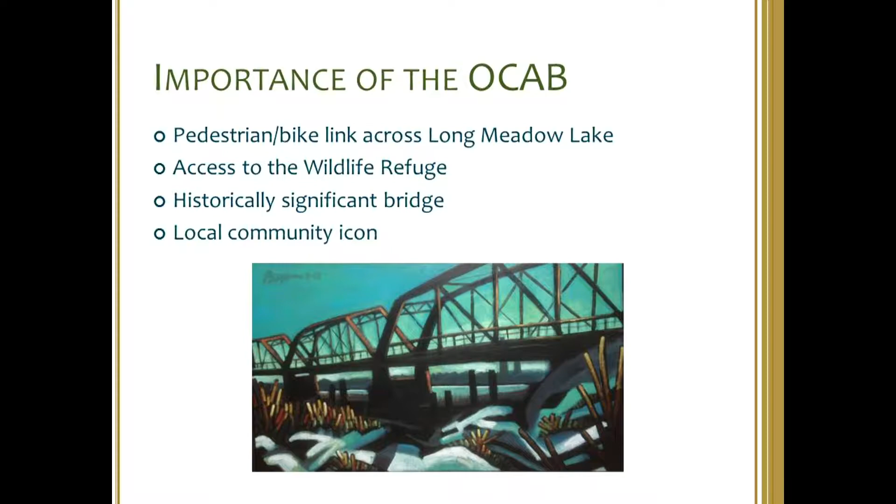Really, this is an important facility in the community. First off, it has been and will be, when it's finished, an important pedestrian crossing of the river valley and of Long Meadow Lake. It provides good access into the Wildlife Refuge that surrounds it. And it is part of the National Register of Historic Places, so it has a significant historic portion to it. And as evidenced by the painting on the bottom, this is a subject of many, many pictures and paintings, and is really a local icon.

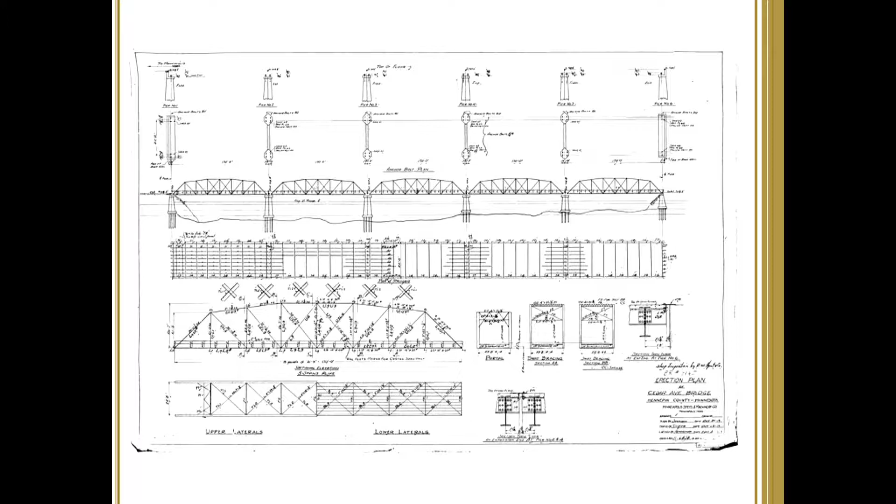This is a picture from the original plan for the bridge, and it's technically called a 5-span camelback through truss bridge. It was built originally in 1920 by Hennepin County and became part of the highway system. It was actually abandoned when the new bridge was constructed in 1979 and turned over to the city for ownership. The city closed it to traffic because of the structural condition in 1993, and then to all traffic, including pedestrians and bicyclists, in 2002.

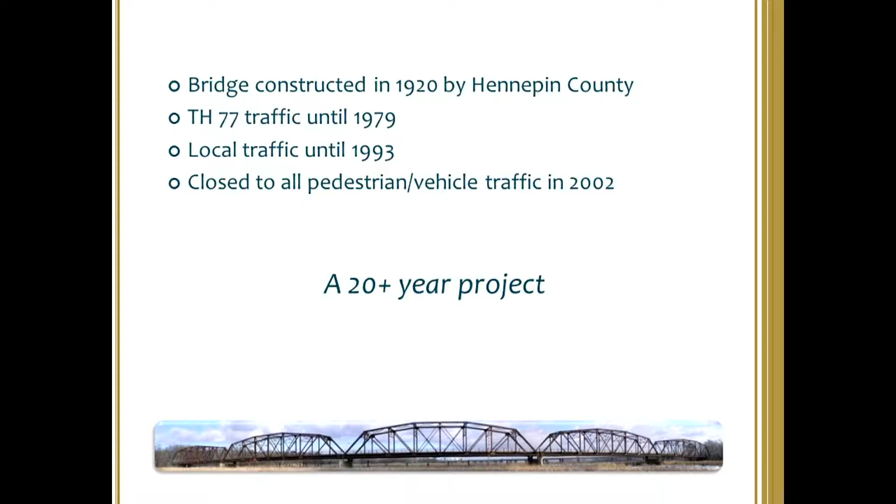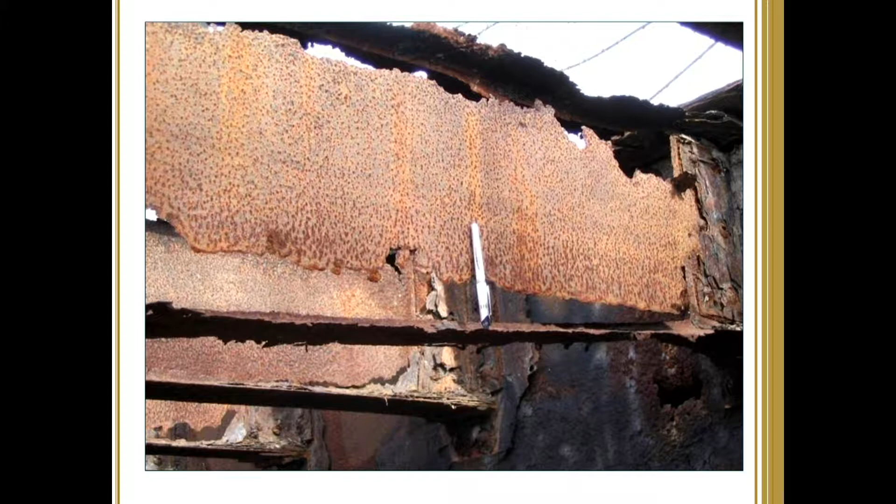And I'll show some pictures of its condition that will show why that was closed. So since its closure, we've been working on trying to figure out a new solution for this. So this has been a long project coming. And really the reason that we're looking at it is it's in pretty darn bad shape currently. These are some pictures of the understructure steel, and you can see it's very much corroded. In many parts, you could actually put your hand through the old steel structure. And again, a number of pictures of the poor condition.

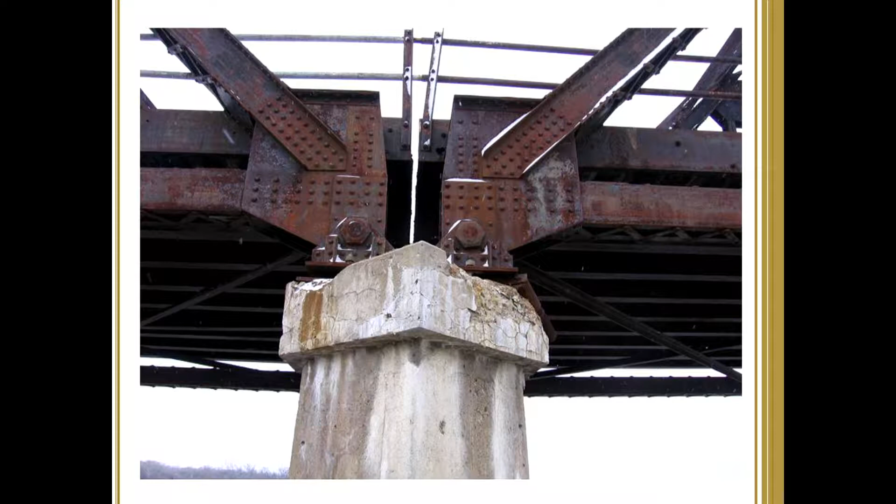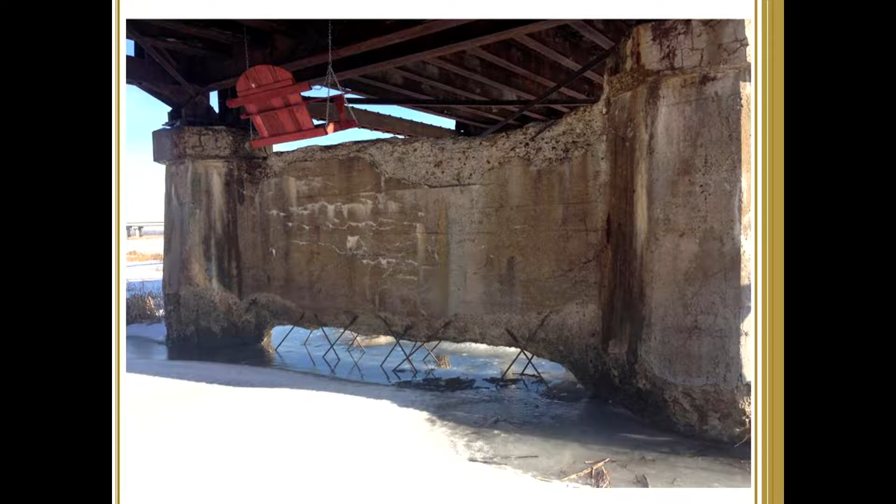Another significant problem is that the points where the spans bear on the piers, we call them the bearing points, are all completely corroded and fused together, which is a bad thing for bridges. The concrete piers also are very much deteriorated. This is a picture of one of those piers in very poor condition. The porch swing was not original to the structure.

So as we were putting together different types of projects to remedy this, there's really 3 areas of concern that we had to try to balance. The first is funding. Obviously, this is a very expensive project, and so the funding that we've looked at over the last 20 years were combinations of federal grants, state grants, and local monies.

Also, because this crosses the river valley and goes through a federal wildlife sanctuary, there's all kinds of regulatory agencies that weigh in, from the U.S. Fish and Wildlife Service to the Corps of Engineers to the state DNR. And so we had to balance those regulations as we put together different project proposals.

And the third being the historic nature of this, which involves SHPO, the State Historic Preservation Office. That's a state agency. MnDOT and the federal agency also have a say in the historic preservation of this structure. And really the question on the historic side had a lot to do with whether we replace the bridge or renovate the bridge as it exists today.

So our first proposal was to replace the bridge back in 1995. And that worked quite well from a regulation point of view and from the historic point of view. Back then, the historic groups were allowing the replacement of that bridge, but we didn't have enough money to do it. So that solution kind of fell by the wayside.

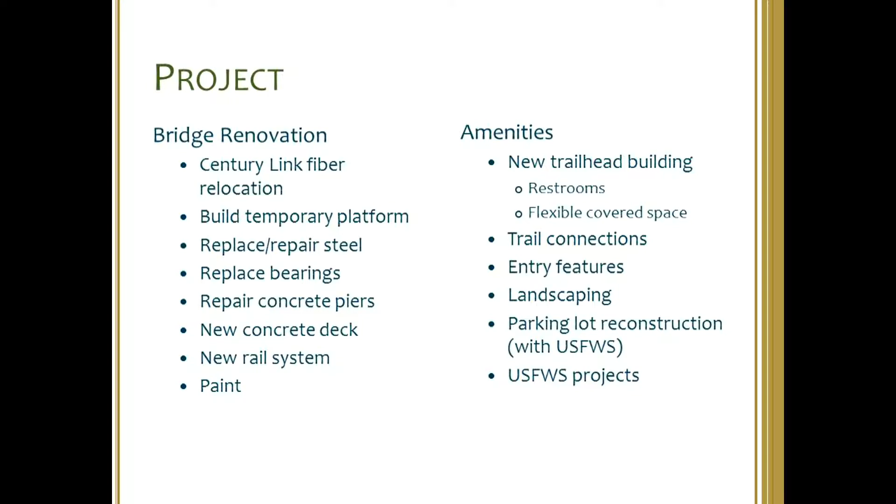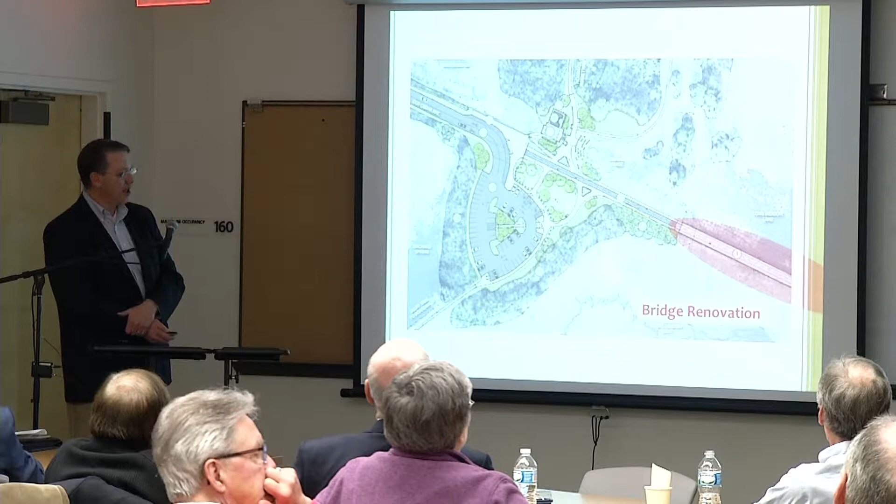This is a drawing of the west side of the bridge, or kind of the Bloomington side, if you will. The bridge project itself is shown here, and the new bathroom and restroom facility is located here.

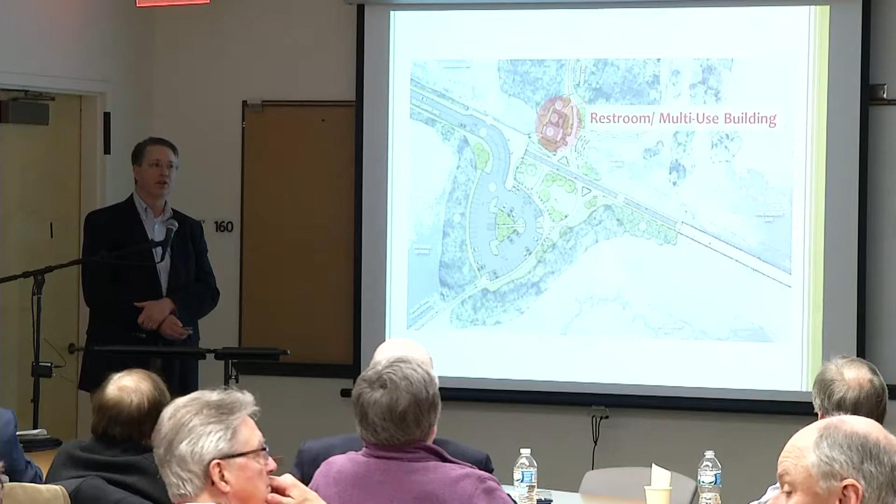Note that this is a location of an old homestead site, kind of an early homestead. It's a little knoll. It's one of the areas that floods the least in this area. This entire area does flood on large events, but the driest portion is that portion where we're going to put the restroom facility.

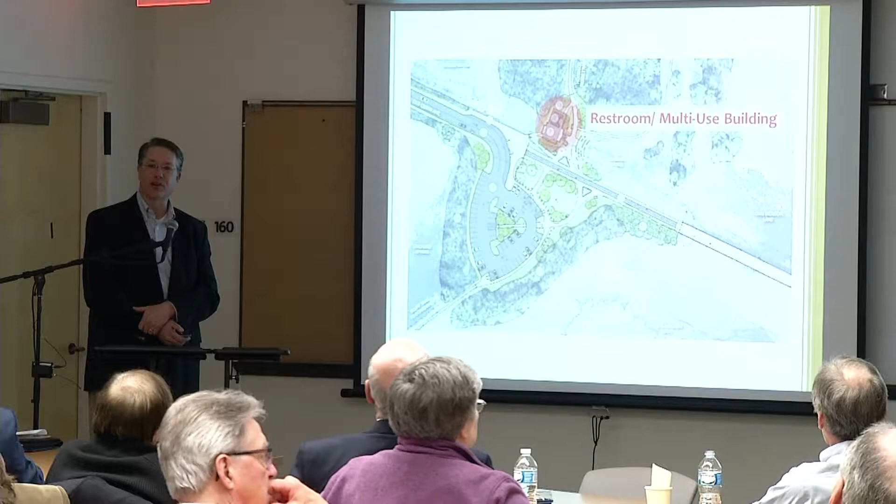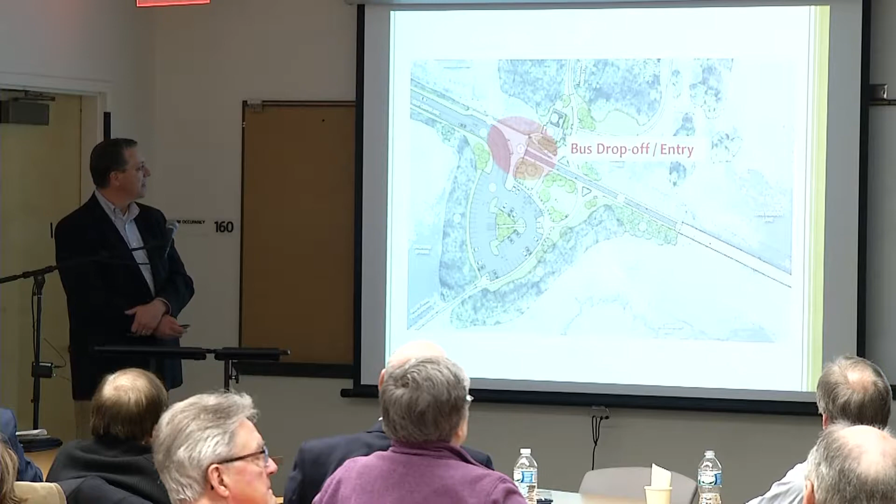Also, there's kind of a natural swale that will be developed as a small amphitheater area that will be used by the U.S. Fish and Wildlife Service for some of their educational programs. A new entry area where buses will be able to drop off school kids, and there'll be some kind of entry features there, as well as the U.S. Fish and Wildlife's parking lot. This is a portion of the project that they will be paying for, but we will be building as part of our project.

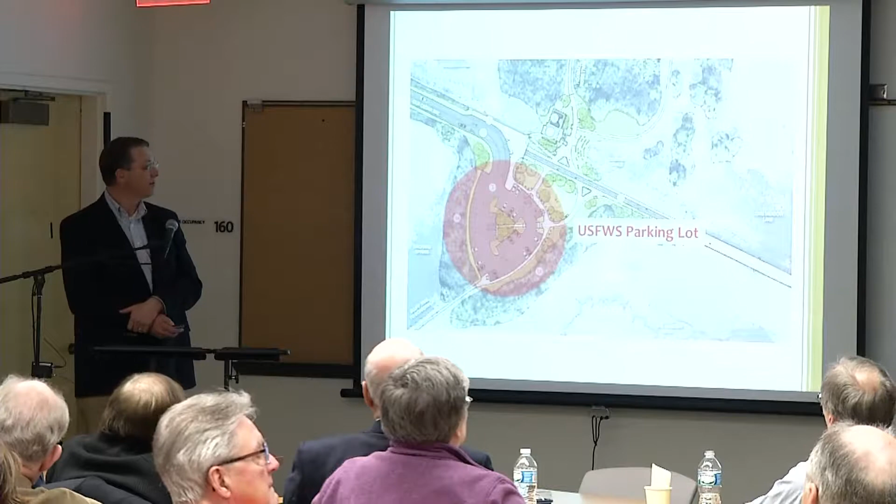The total project cost is approximately $23 million. The bridge itself is close to $20 million, and the amenity package approximately $3 million. And there's quite a complicated funding package for this. It includes state bonding monies, some federal grants, includes some fiscal disparities TIF. This is the monies that come out of that special legislation in 2013. Local funds, and some other additional development funds from our South Loop Development District.

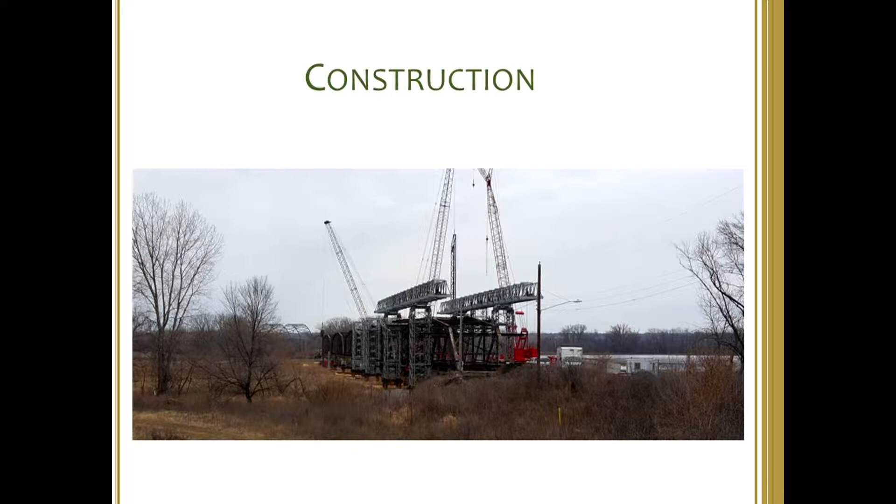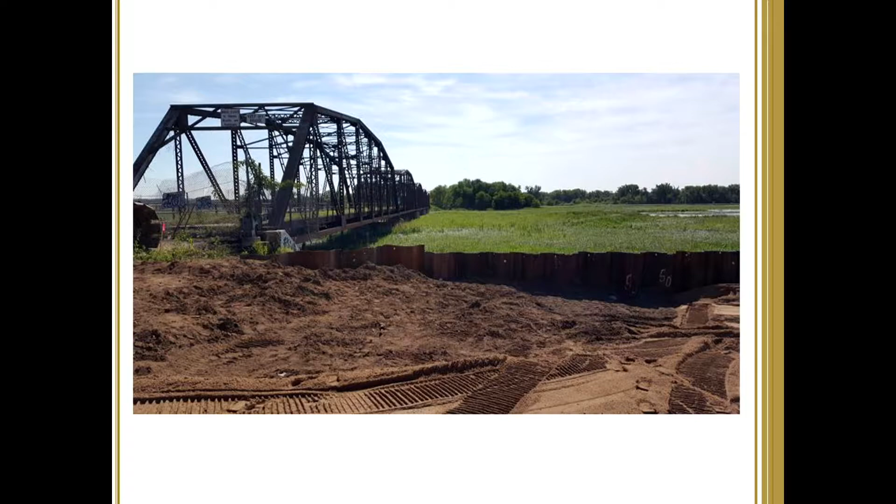So I have a number of pictures of construction. Really, the first part of construction was to build a platform to the south of the existing bridge so that large construction equipment could be used to renovate the bridge. So this is the beginning of that new, in a sense, a parallel bridge being built through the wetland. And I have a series of pictures of that as it's being built.

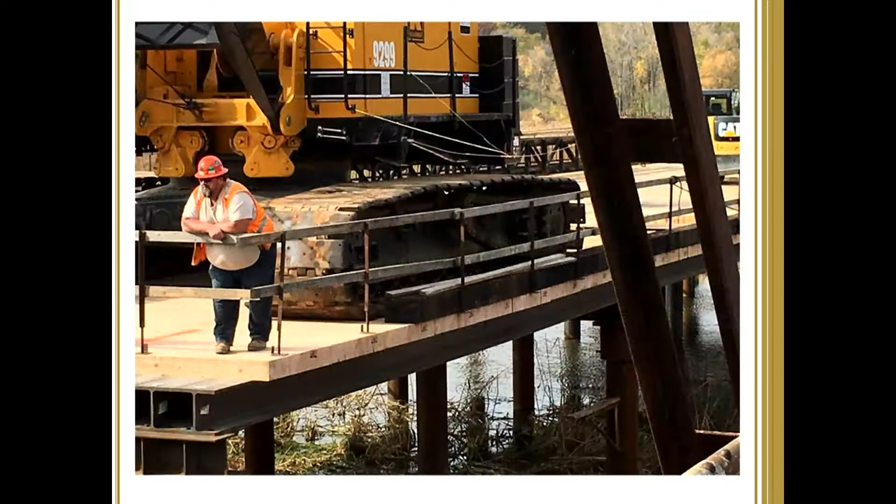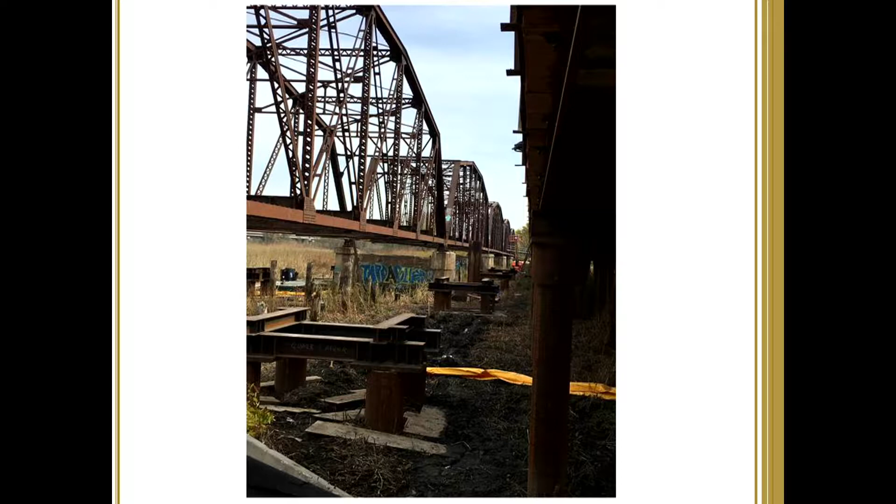So I would note that this structure is a very heavy-duty structure and needs to be built strong enough to handle a lot of large construction equipment that's needed for the bridge. Another part of this project is to build these small little piers that are going to be used to build temporary false work that's going to be used to actually lift the bridge off its piers to be renovated. And I'll show you those as we go along.

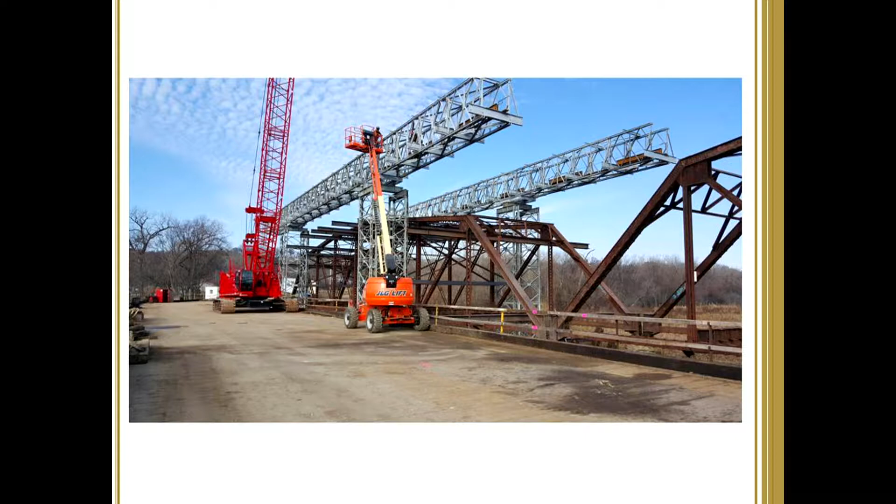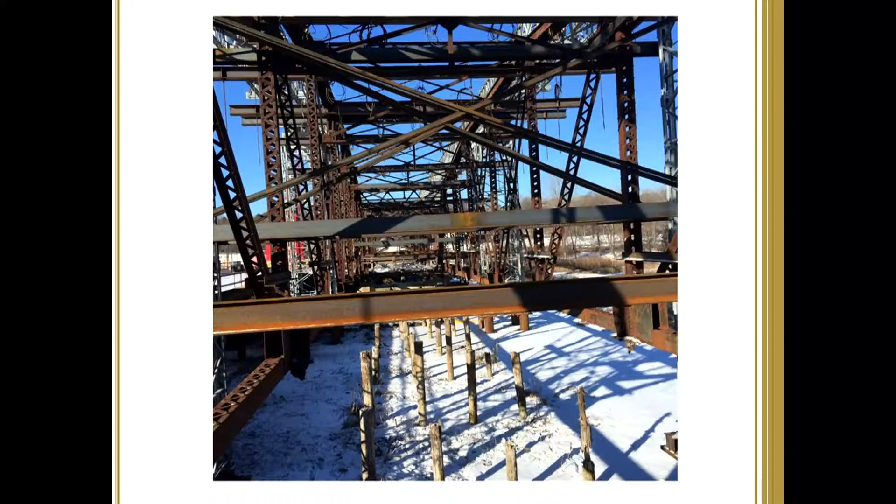Again, this is that false work that is designed such that we can actually lift the bridge off its moorings so that we can repair it. A picture again of that false work kind of intertwined through the bridge.

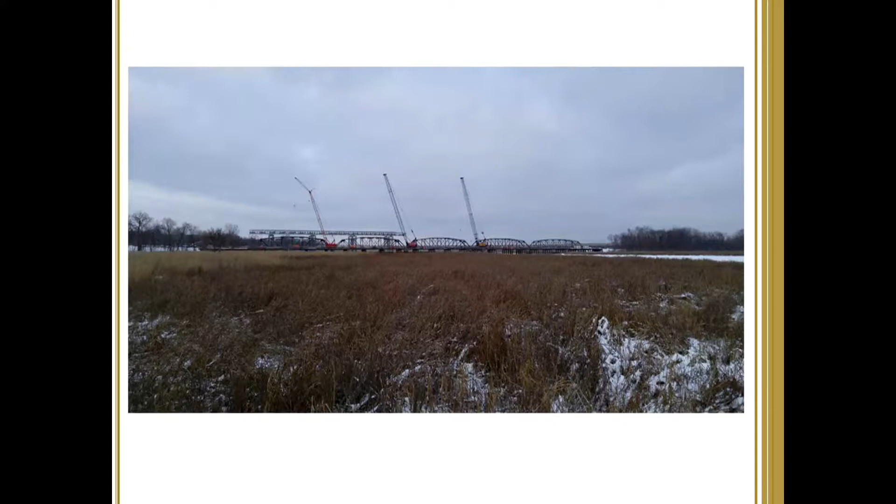What's interesting about this is that there are a number of piers. These are just wooden piers that are underneath the bridge. These are actually from an 1890s bridge that predated the Old Cedar Avenue Bridge, and they still remain today. That was an old wooden bridge that had deteriorated rather quickly. Again, seeing that false work from a distance.

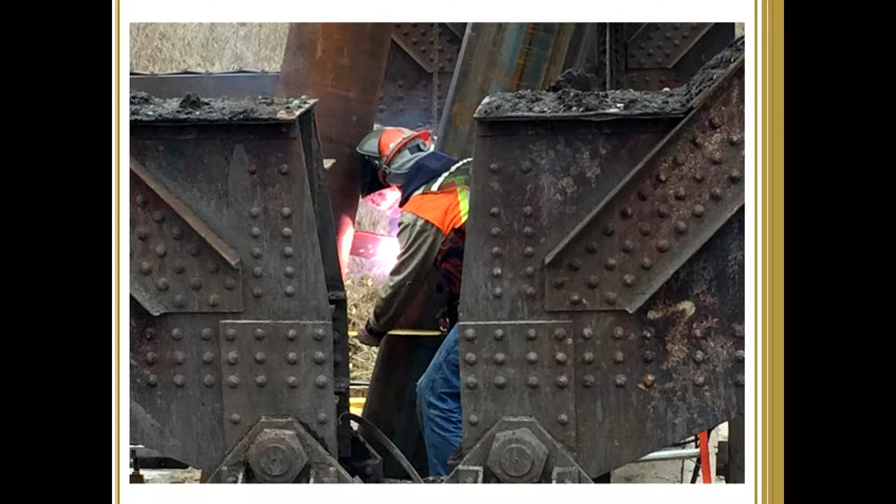One of the main activities in renovating the bridge is to repair all the steel that is rusted or bent. And so this started out with kind of taking apart the joints at the various portions of the bridge. And note that the original bridge was built with steel rivets that held all the pieces together. And I'll speak a little bit more about that later.

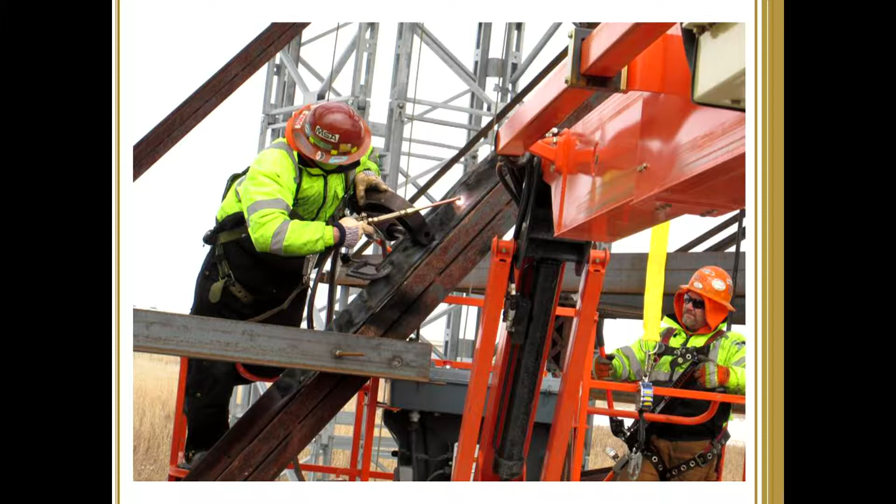Also bending some of the pieces that had been hit by trucks in the past. So this is a process called heat bending, where they actually heat up the members and pull them with large pieces of equipment to straighten them.

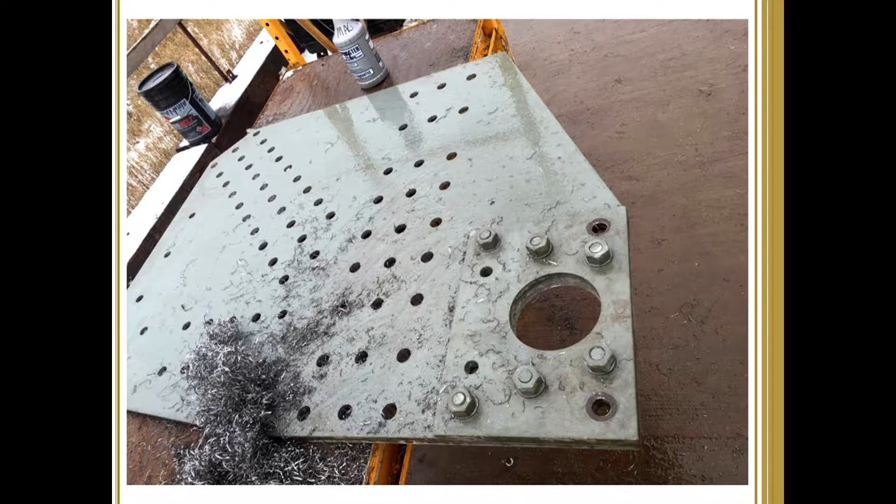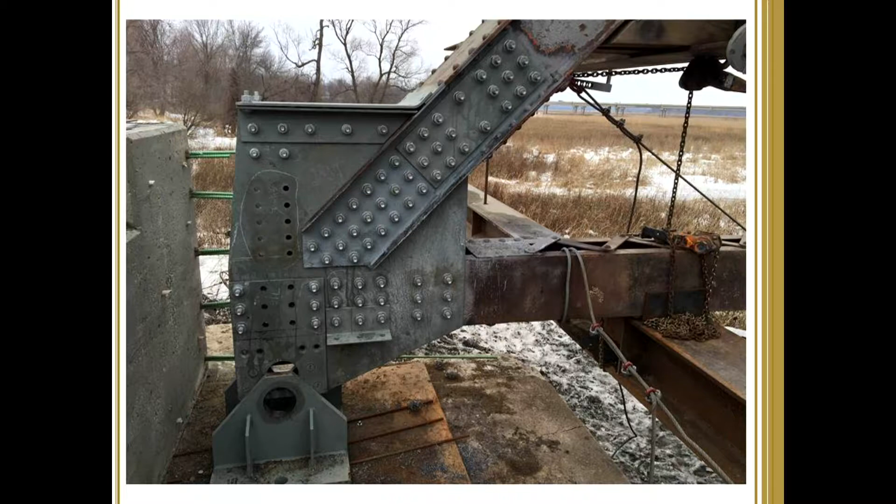And some of the bridge components were actually rusted beyond repair and had to be replaced. So this is a gusset plate at one of the bearing points that was fabricated to replace some of the steel that had pretty much rusted away in the old structure. That's that same piece of steel that's in place. And here you would make note that we don't have rivets, but we actually have bolts. And I'll talk to those in a moment as well.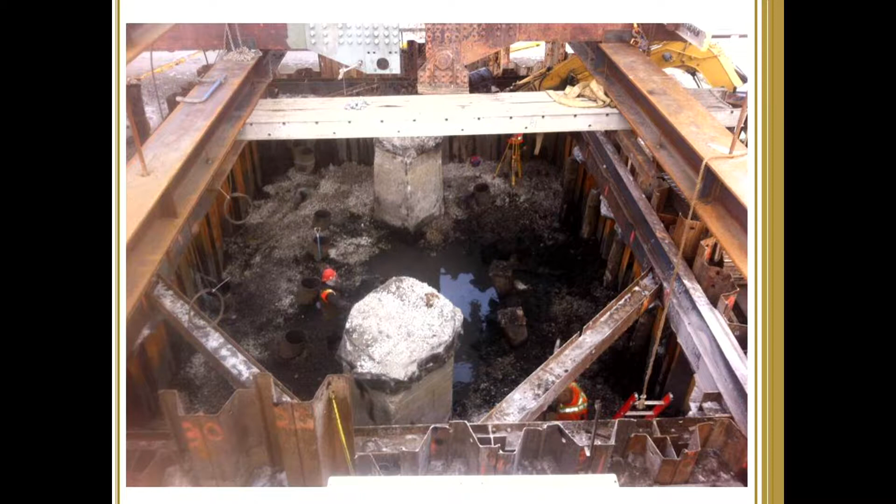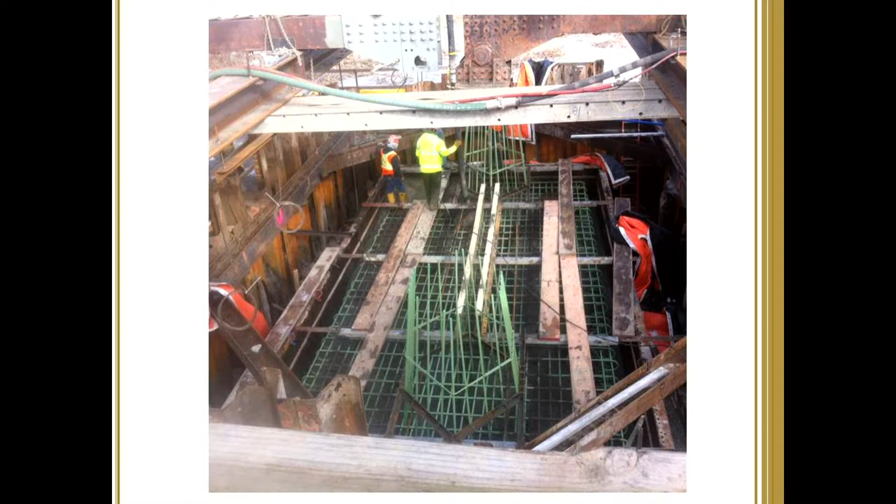Another main component is the reconstruction of those concrete piers. So this construction involved the building of a wall, a barrier around, and the water was pulled out from here, and the muck was pulled out so that we could get to these concrete footings, or the piers, and had to reconstruct those. So there's a series of pictures of how that was accomplished. So again, rebuilding those piers.

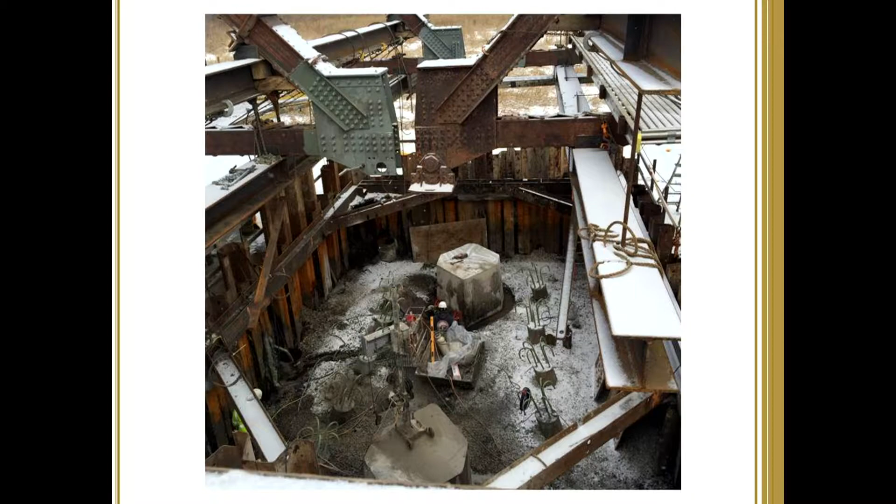So there was a lot of work done to try to determine what would be a design that was in keeping with the historic nature of this structure, but also appropriate for the new use for bicyclists. And so really the solution was a higher rail, but that has a rail underneath it that matches the old rail.

So I talked a little bit about the bolts and the connections. So the original structure was built with rivets. And these were actually heated up on site, and there were craftsmen that were very good at putting in hot rivets. That's a trade that's really no longer available in the marketplace. There are a few hot riveters, but they're in high demand and the cost is extremely high.

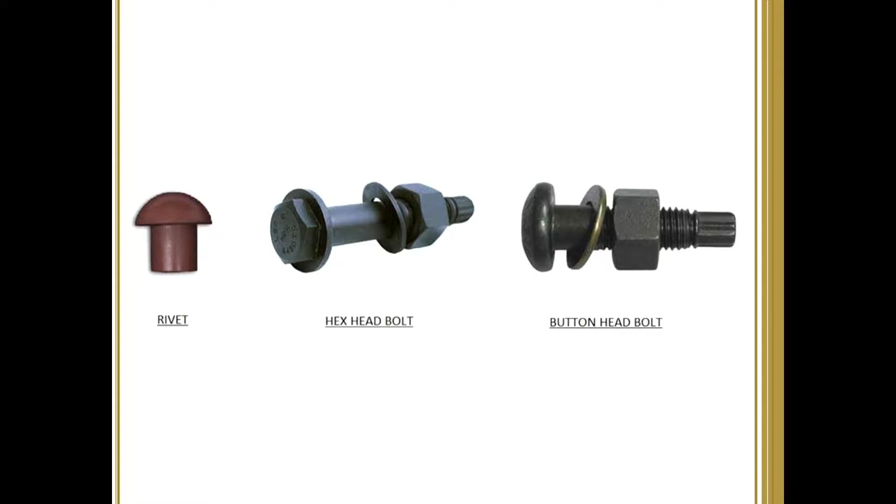So again, with the historic agencies, there was a long conversation about what the appropriate connections would be. There must have been about 5 or 6 memos that went back and forth about rivets alone. The hex bolt is probably the industry standard for connections today. And so I think the compromise solution was a button head bolt, which looks kind of like a rivet, but acts as a regular bolt. So that's what's being put into the bridge today, the button head bolts.

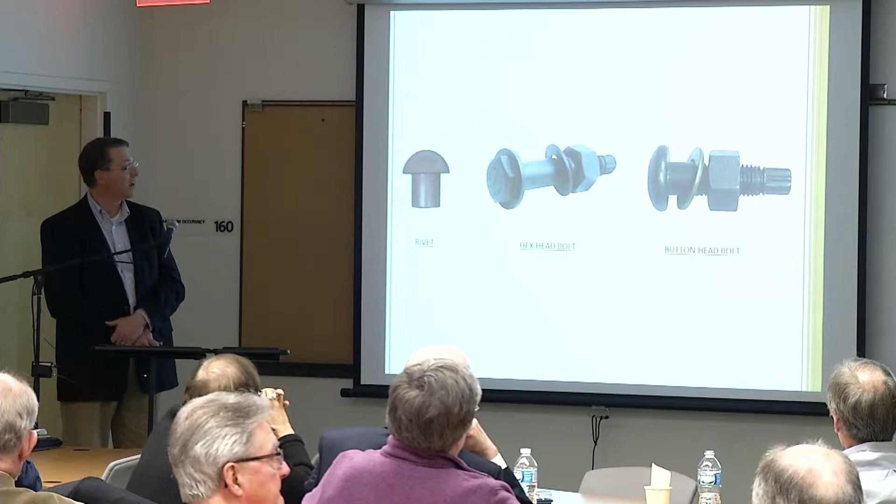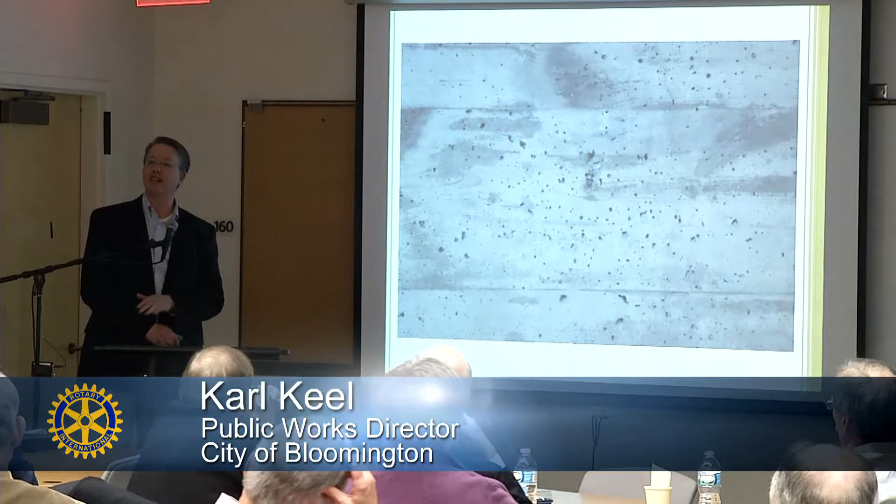Again, my point here is that this has been sort of a unique project in that every step of the way we've had to be extremely careful about all the details associated, trying to balance the historic nature of the structure with kind of practical needs for the use of the structure and for available construction methods.

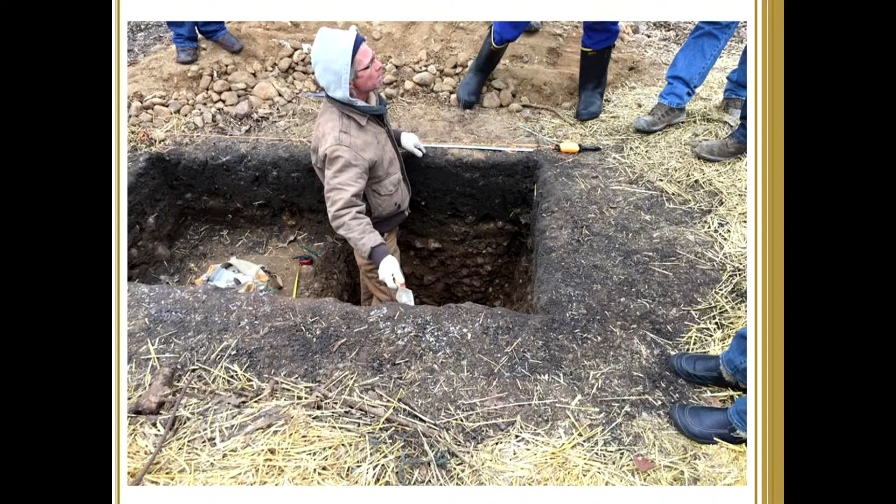Also dug a lot of holes looking for artifacts. So this is a gentleman that's been an archaeologist doing a dig. We did find in a number of areas a bunch of rocks, they look like to me, but they're actually lithic debitage, which my understanding is a fancy term for construction debris, ancient construction debris. Apparently this area of the river valley was used to gather stones that would be suitable for tool making.

And so these stones were not the actual stones that were made into tools, but rather stones that were discarded by the folks that were looking for stones. They would typically break a stone. If it was suitable for tool making, they would put it into their satchel and go to their camp and actually make the tools. But this construction debris, kind of an ancient construction landfill, if you will, is left in this site.

And so as we were developing our design, as we proceed through construction, we've had to adjust it to try to either avoid these areas where we found these materials or to document where they are and to map them out. So it's slowed construction considerably.

So the project began in the summer of 2015. It was actually delayed by about 3 months for some difficulties of moving a large fiber optic line. We expect to begin the amenities, that's the park structure and the things that are happening on the west side of the bridge, this coming summer. All to be completed approximately a year and a half from now, in the summer of 2017.

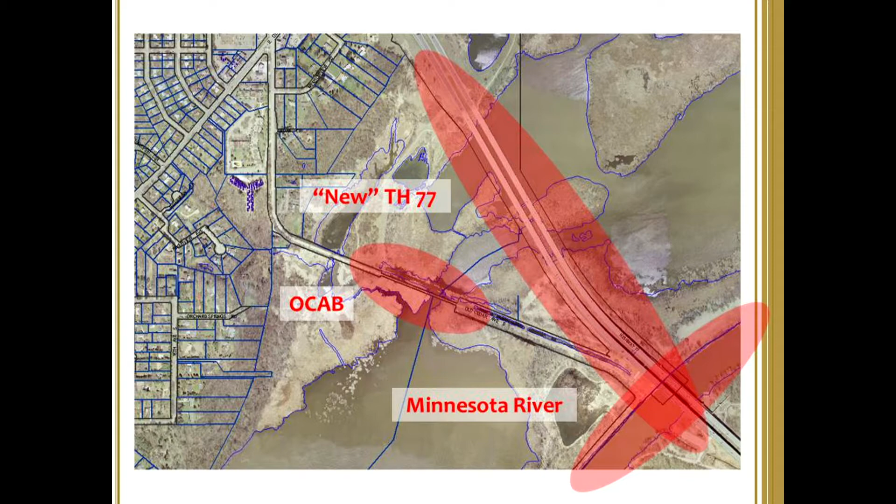So currently, this is the Old Cedar Avenue Bridge. And the border between Bloomington and Burnsville is through the middle of the river, approximately here. So when you cross the bridge, you go down a trail, and there is an existing pedestrian bridge strapped onto the highway bridge. So you go up this bridge across the east side and then down. So that's the landing on the Burnsville side.

What was there historically? Historically, there was a swing bridge there, and that was removed at the time the new bridge was built in roughly 1979. So that's the historical pictures we see where boat traffic's going through. You're either seeing that one or you're seeing the one that exists still today on the south side of Normandale Boulevard. That is a swing bridge too. So there were two swing bridges.

How much historical oversight is there with respect to this reconstruction? Is it just here's the design and go forward, or is there ongoing review from a historical perspective? Because this project has federal dollars and it goes through a federally owned property, you have to meet the historic requirements. So there was a huge amount of historic input in the design process, and there's fairly large ongoing scrutiny during construction. So as we're pulling apart the joints, we have to decide, are we going to replace portions of this joint, or are we going to repair them?

From our point of view, we would like to replace them because we're trying to make it as strong and last as long as possible. The historic folks want us to replace as little as possible. So every time we have to make a decision about how we're going to handle a given joint, there's a conversation about, do you absolutely have to, or can you get by with less? So to your point, there's a great deal of scrutiny during construction. The problem with that is it costs us more, which is of concern, but equally important is that it slows the project down considerably.